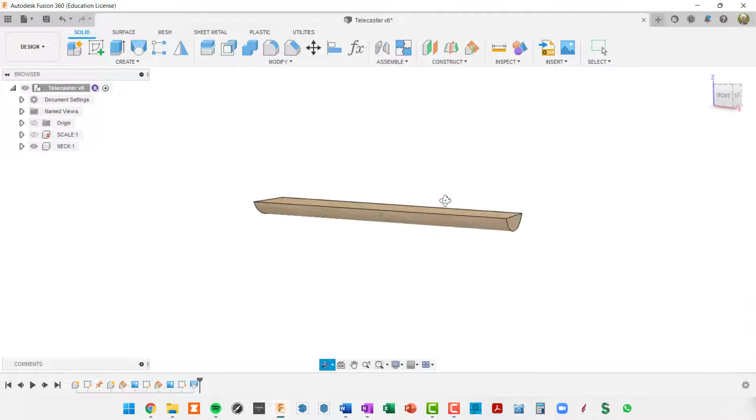So here's where we stand at the end of the first video. We have our neck profiled basically from fret 1 position to fret 12, and we've also created a scale in a separate component showing all of the fret positions and also showing the bridge and nut position.

So in this video we're going to extend the neck towards the body and create the heel.

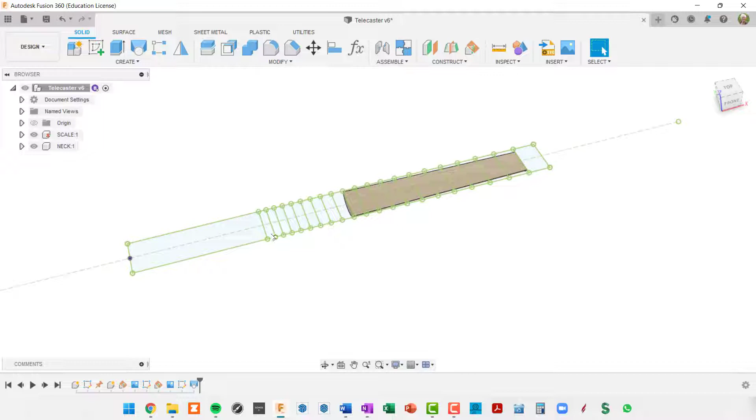I think the first thing I'm going to do is lock down the neck. We locked down the scale already, but we don't want to be able to accidentally move this neck around in 3D space. So I'm going to right click on the component and select ground, and now if I try to move it, it's not going to move.

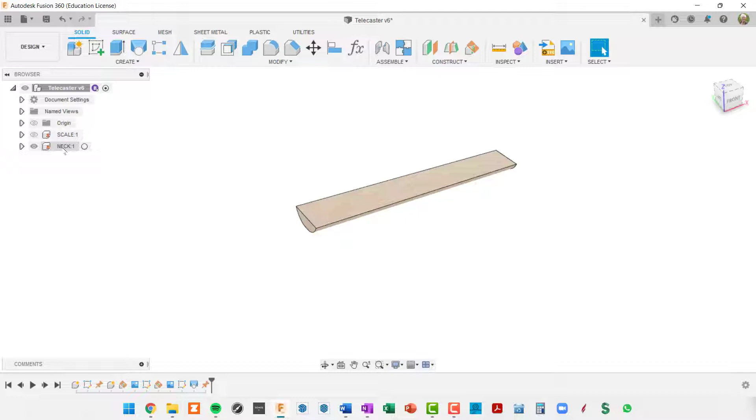All right, so the next thing we're going to do is bring in another drawing, actually a drawing of the body, so that we can extend the neck the proper distance. Before I do that, I want to create another component because I want to put that body canvas inside the guitar body component.

So I will create a new component and name it body. That component is automatically activated by Fusion, so now when we insert another canvas, it's going to go inside that component.

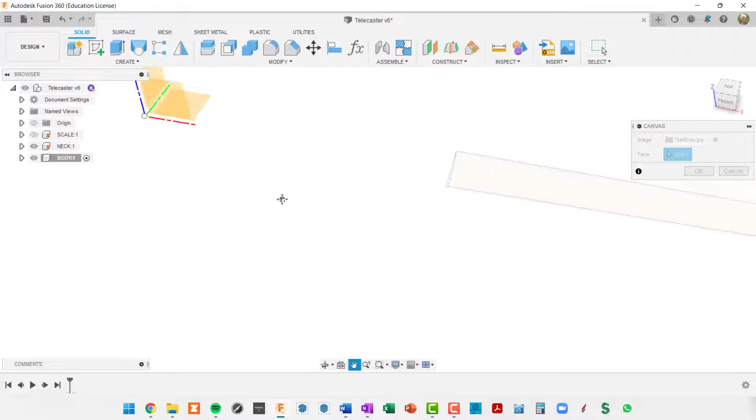So I'll go to my planes here and pick Telecaster body, and I'll select a plane to insert that on, and just take this plane right here. At the same time, I'm going to cut my opacity down a little bit.

Okay, so this canvas came in pretty small, so obviously we need to scale this up. So the first thing I'm going to do is expand my body folder, expand my canvases, and there's the canvas that I want to calibrate.

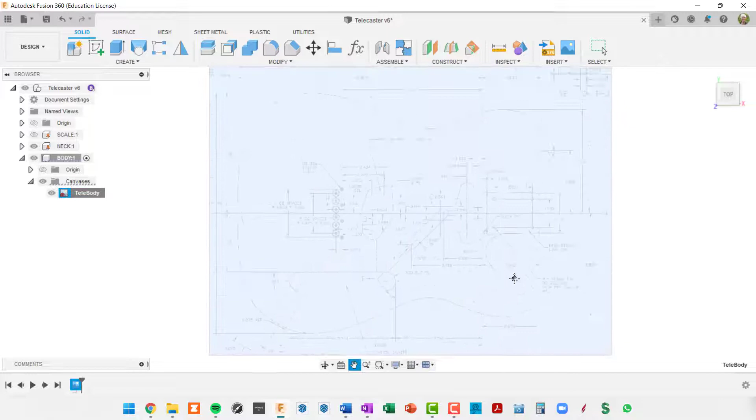So I will right click, calibrate, look at it from the very top, and now it's just a function of trying to find a decently long measurement here to calibrate from. I think I'm going to use this one right here.

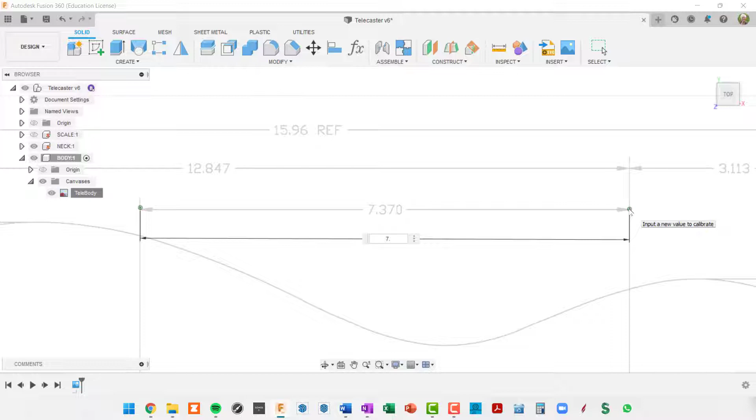So I'm in my calibrate tool. I've got this crosshair here, and I've got the 2 points that I want to calibrate to in sight. So I'm going to click on one of them and then click on a second one and then type in that measurement. 7.370 inches. And I'll press enter.

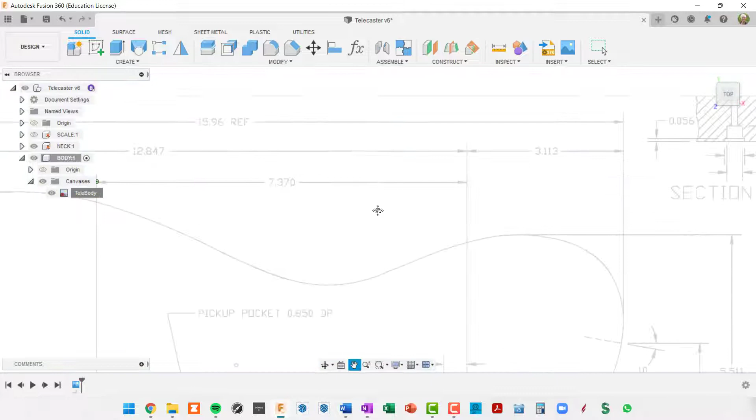So now we've got a scaled up body. Let me just verify one of these measurements is close. I'll go back and calibrate again, and click on this side, and then click on this side. And we've got 7.36 and a fraction. So we're fine there. I'm going to hit escape.

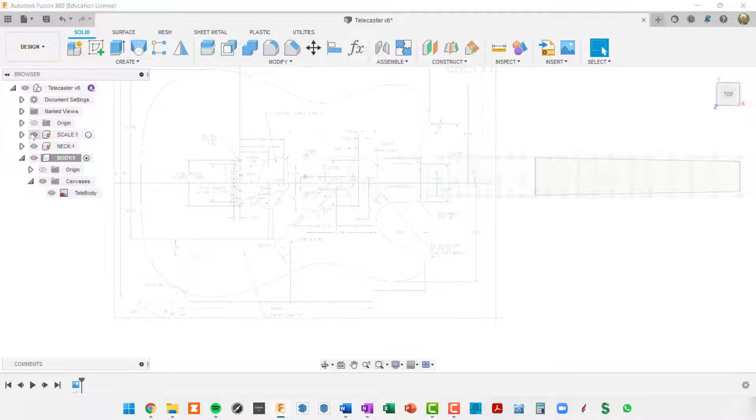All right, so now we want to actually move this body into the proper position relative to the scale. So I'm going to turn the scale on. One of the things you can see is the scale actually has an ending here, which is our bridge position, and the drawing also has a bridge position, which is this line right here. So I'm going to activate the top level component just so that we can see a little bit better both the drawing and the scale.

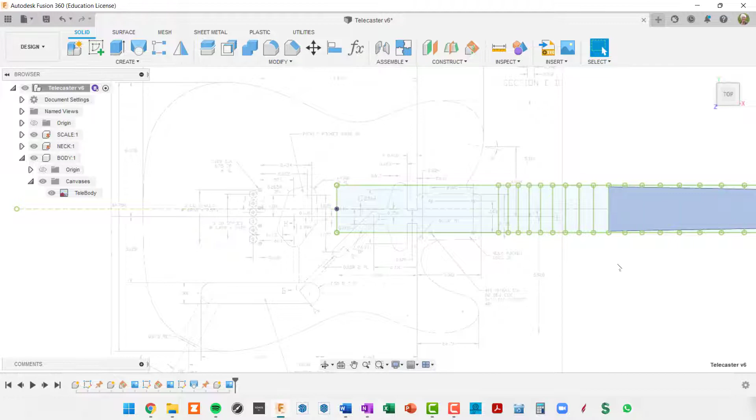And I think I'm going to go back in there and change back into the canvas and change the opacity, make it a little bit stronger here. Okay, so now we can see both the scale and the drawing, and we want to do two things.

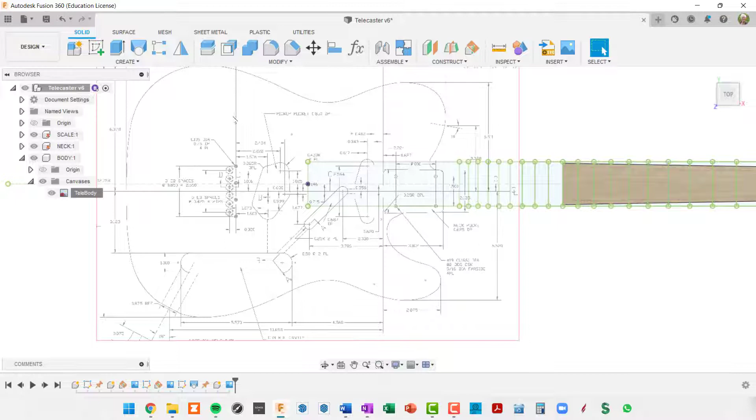We want to align this center line in the drawing to our center line of the scale, and then we want to align this vertical line here, which is the bridge line, to our bridge in our scale component.

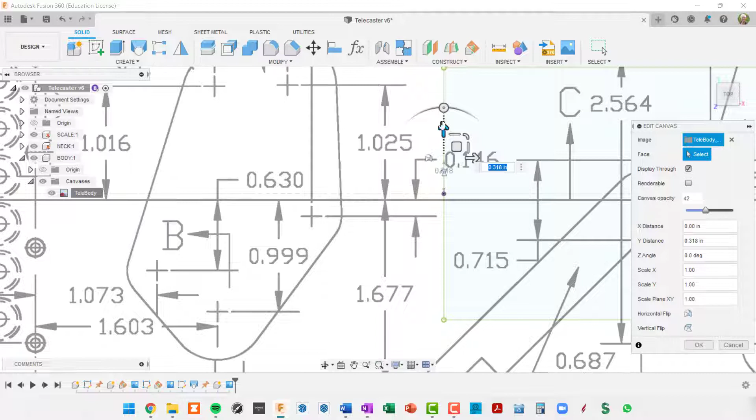So I'm going to right click on our canvas, go to Edit Canvas, and I think the first thing I'll do is to center it. So I'm going to move this up and actually zoom in quite a bit so we can see our center line and get that right there.

Okay, so now we want to move it horizontally. There's our bridge line in green, and I'll zoom in here to get this pretty accurate.

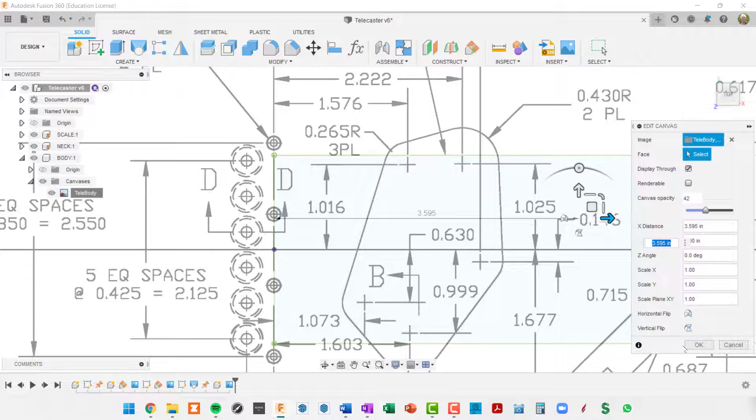Right about there, so click on OK. Now our canvas is aligned to our scale.

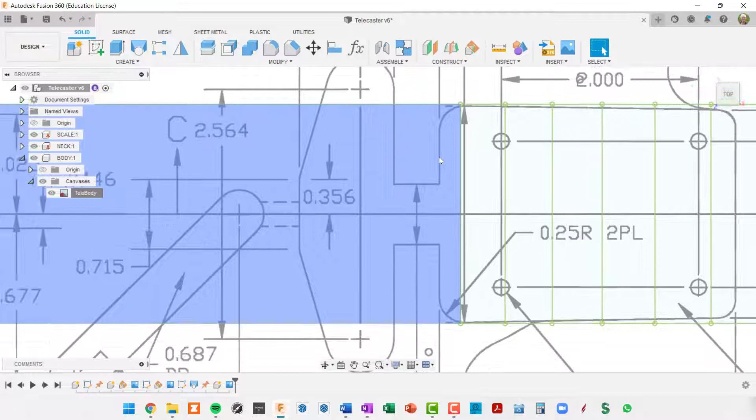So the next step is to extend this neck to this point in our drawing. I think what I'm going to do is create a sketch inside the body component. So I'll activate that and create a new sketch.

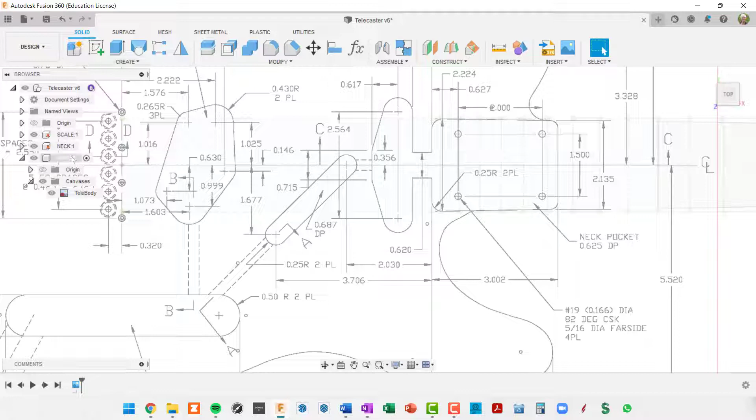So basically I'm sketching right on top of this drawing. Oops, I got into new component there instead of new sketch. Let me try that again. We're in the body component, I'll create a new sketch.

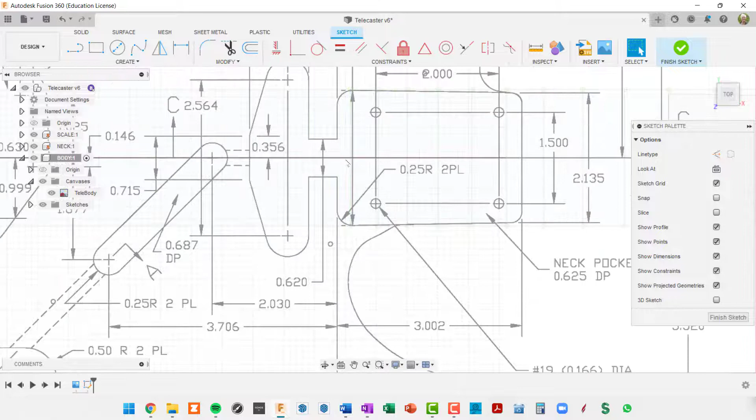Now it's asking me what plane to put it on. I'm going to do the same plane as the top of the neck. Now, this is the line that we want to get in the sketch initially, and we want this line to start from our center scale line, which is a little hard to see here because I changed the opacity again of that drawing.

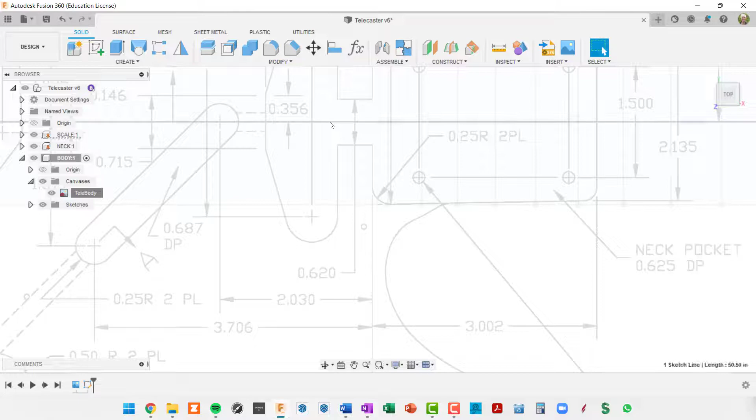So let me get out of the sketch and one more time get into this canvas, edit it, and turn the opacity way down. Now I think we're going to be able to see our center line right there, and we're also going to be able to see this end of the neck, the heel end of the neck.

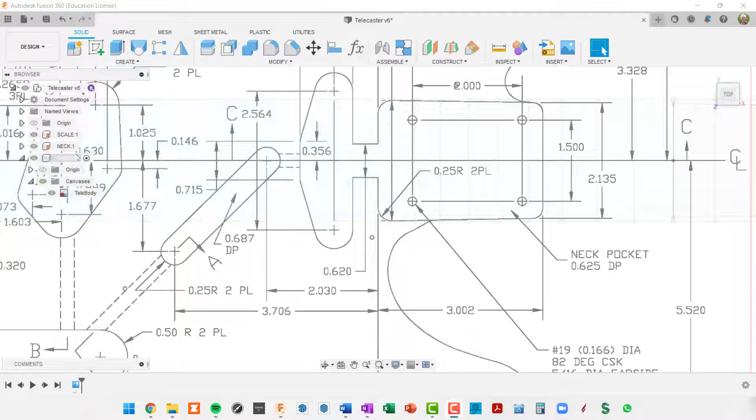So the next thing we want to do is draw a vertical line over this drawing to represent the heel end of the neck. But I want to do that sketch inside my neck component, so I'm going to activate that neck component. I'll collapse the body down and expand my neck out so I can see what's going on.

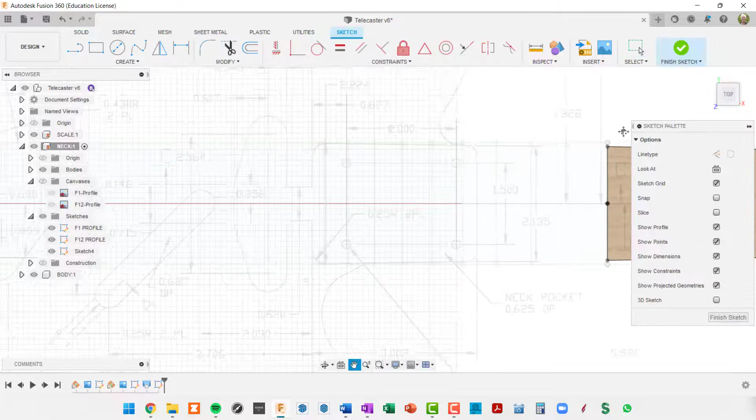So then we'll create a sketch, and the sketch plane is going to be the top of the neck, so I'll click there. And now we get the drawing back in view.

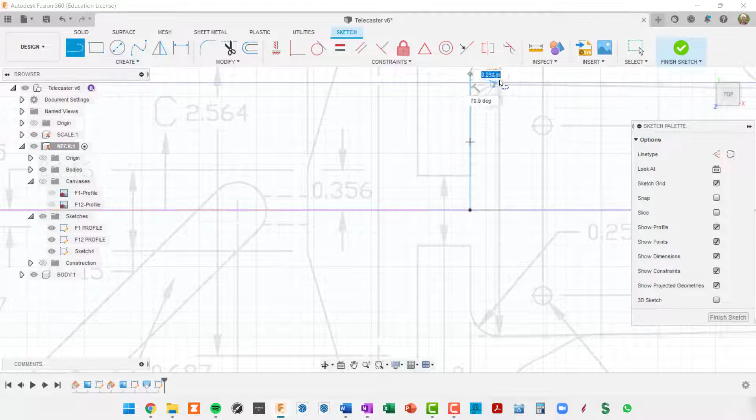So if I go get my line tool now, and if I hover over our center line, which is in the scale sketch, you can see that I get an X, an intersection with that center line. So I'm going to click there, and come up vertical and go beyond the half width of the heel, click again, and then click in this little check mark, which is eluding me.

There it is. Then I'm going to start again in the center, click there, and go down vertically beyond the width, click there, and check mark. So now you can see we've got a vertical line that aligns with the drawing.

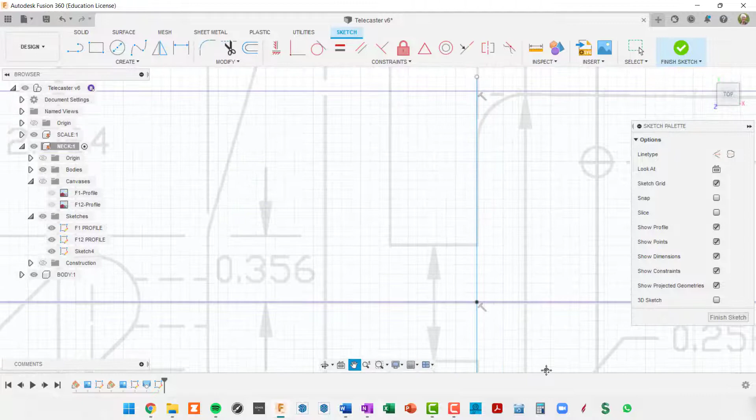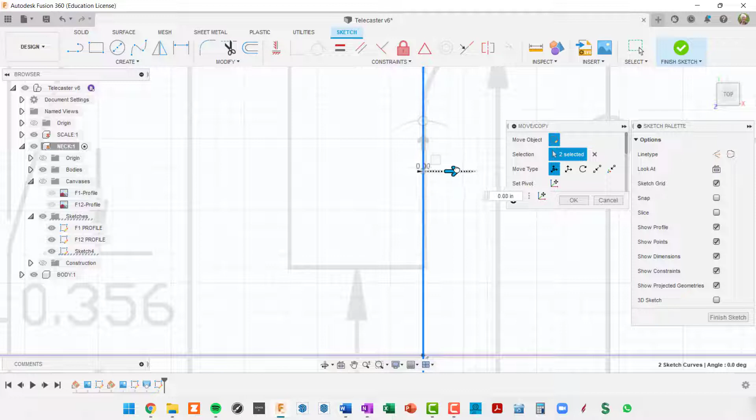If you don't quite get it there, I guess I could tweak that a little bit. I'm going to click and shift click on that line and then press M for move, and in the move tool I can actually move both of those line segments around a little bit. So if I zoom in, I can see, I can get that exactly on the right spot in the drawing. Okay, so I'll click OK.

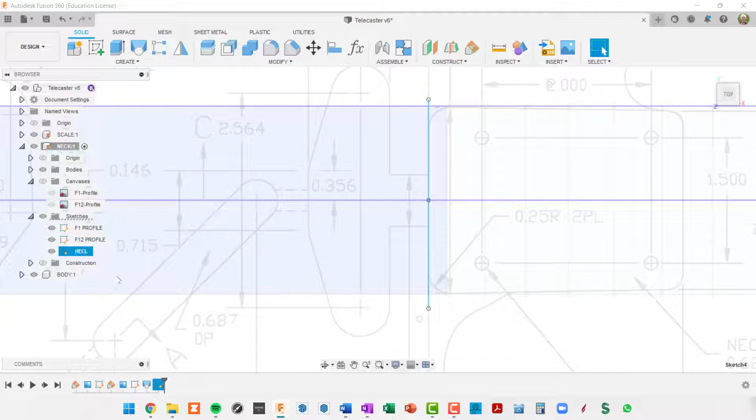So now that's going to be where we essentially extrude our neck, our existing neck, out to this line. So let's finish the sketch, and I'm going to go over to the browser and click in that sketch, wait a second, click a second time, and name that heel. We're actually going to put more stuff in that sketch, that's just the start of our heel.

All right, so now let's orbit up a little bit, and we can see our 3D body of our neck. And now you might think, oh, let's just extrude this to this line. But if you do an extrusion, you're going to get a straight profile. The neck is going to be just as wide here as it is here, but in reality, the neck continues its taper to this point.

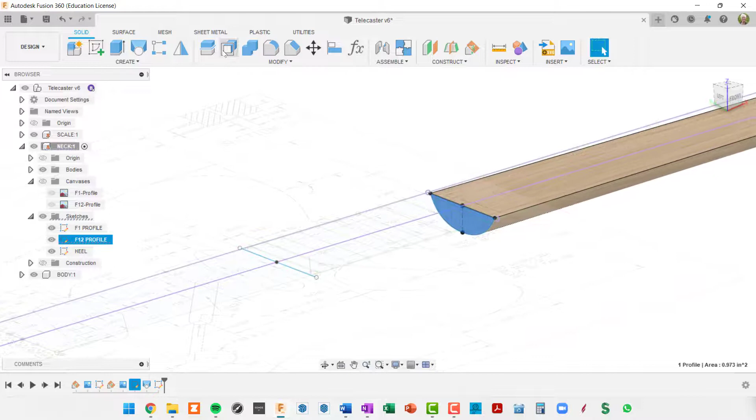So Fusion has a feature that will do that quite nicely. It's called offset faces. So if I click on there, I can select the face I want to offset, and then I can drag it out. And this is getting wider as we go. But I don't seem to be able to snap to this line.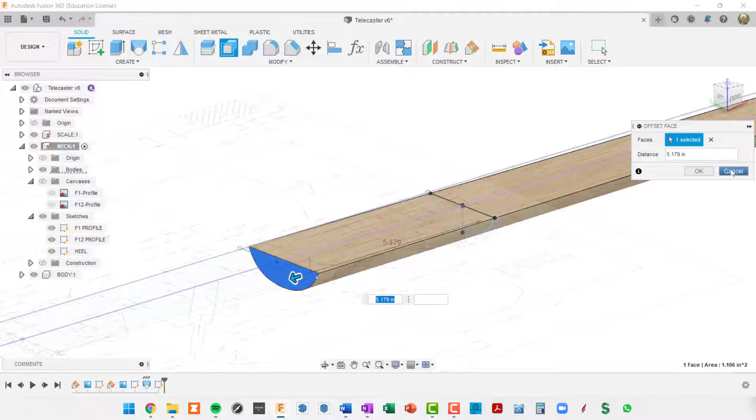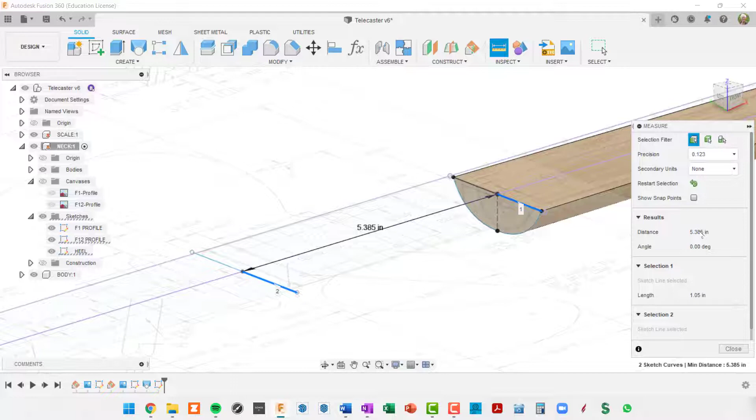And I do see that I've got a distance here in the dialog box. So I really need the distance from this line to the end, which we can derive. So I'm going to cancel out of offset face, and I'm going to go into my inspect measure, and I will click on this line and then this line, and I'm going to get a length of 5.385. Instead of writing that down or trying to memorize it, I'm just going to click in the dialog box, and that will copy that value so that we can paste it later on.

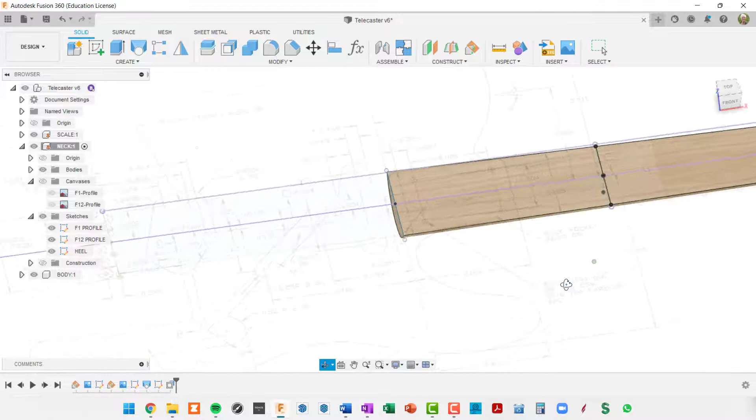So I'll close, and I'll go back to offset faces, select the face we want to offset, start it in the proper direction, and then I'm just going to do a Control V, which is going to paste that value in, and click on OK. So now we've got our tapered neck. It is actually wider here than it is here. And let's look at it straight on from the top.

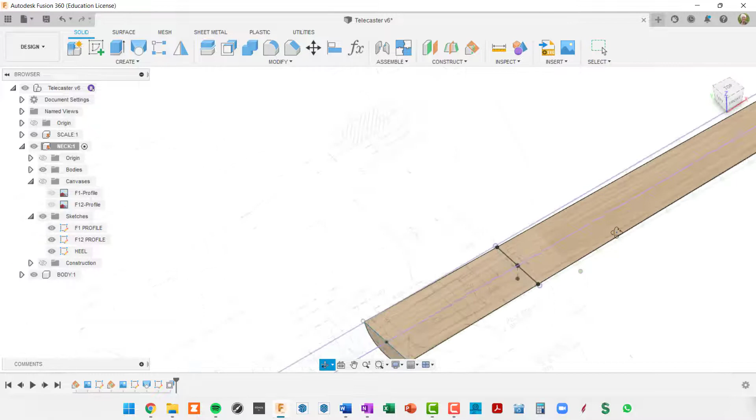And one thing that I notice is the neck is actually a little bit wider than the pocket in the body that's going to receive it. So how do we fix that? Well, that's actually a lot easier than you would think. We're going to go back to the fret 12 profile and actually change the width of that profile very slightly. And then Fusion will automatically redo the loft from fret 1 to fret 12 and automatically do the offset faces that we just did. So all we need to do is find the proper sketch, which is our F12 profile.

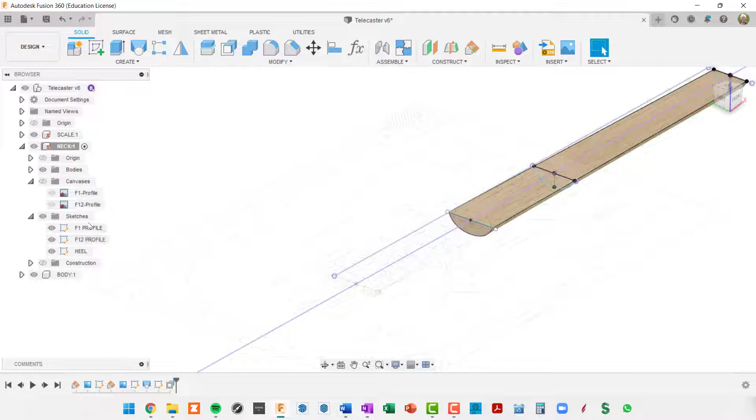And this is a good example of why you want to name your sketches. You don't want to be looking at sketch 1, 2, 3 here and figure out, well, which one is which. Now I know. F12 profile is what I want. So I click, right click, edit sketch, and I'm in my F12 profile. But I can also see my F1 profile. So I don't want to accidentally select that. So I'm going to hide that sketch.

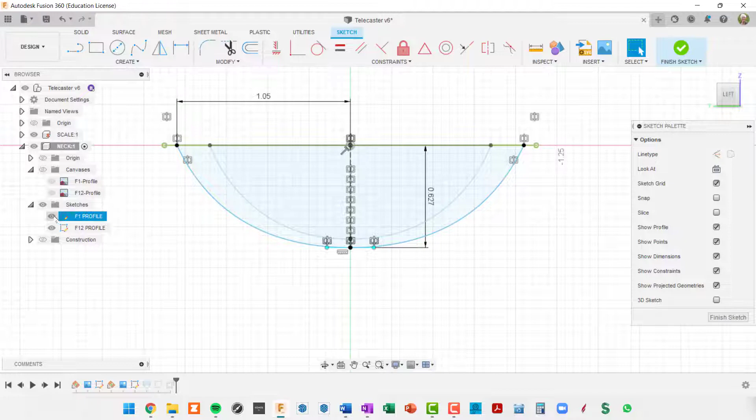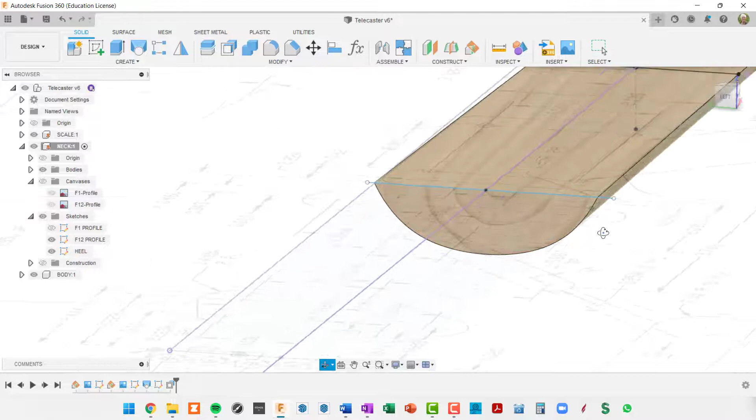Okay. Now, there's a measurement here, which is half the width of this profile. So I'm going to double click on that and then just ever so slightly change that to 1.04. You can see that the profile width changed a little bit. And I'll finish the sketch. And now let's take a look and see if we look straight on from the top. Let's see how we stand now. You can see that the neck got a little narrower, but it's still a little too wide.

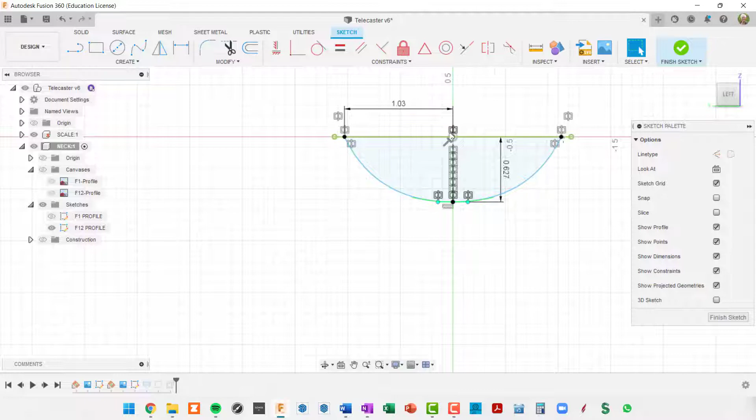So let's go back to our F12 profile sketch, edit that, and let's change that to 1.03. So a bit of a trial and error thing here, but not too hard to do this. Again, looking at the top, and to me that looks perfect. That taper comes right in and matches the drawing absolutely perfectly.

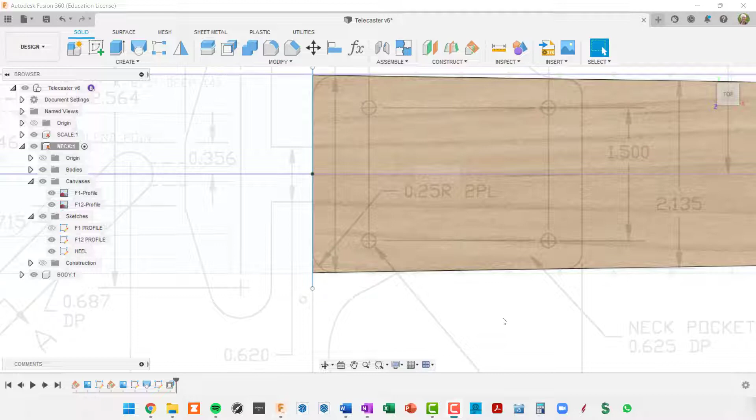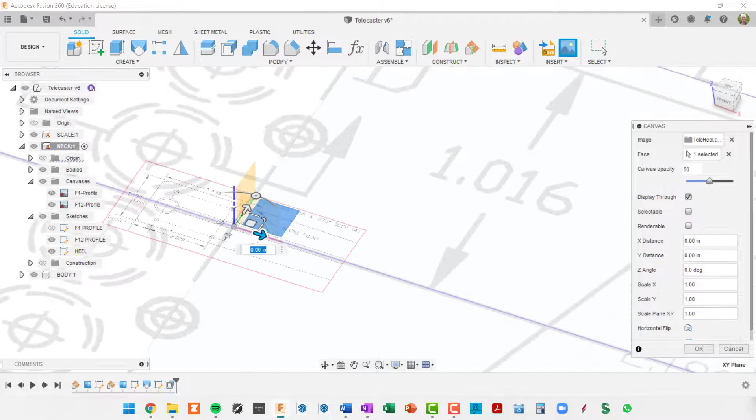So the next thing we want to do is bring in another drawing, and this is going to be the profile of the heel that we're going to extrude. So I'm going to go to Insert Canvas, and I will pick my Tele Heel and do an insert. And now Fusion wants to know what face to put it on, so I'm going to select this plane here in our origin. And then I can see this drawing here. So I'm going to click OK, because the first thing we want to do is go back in and calibrate it. So here's my new canvas, Tele Heel.

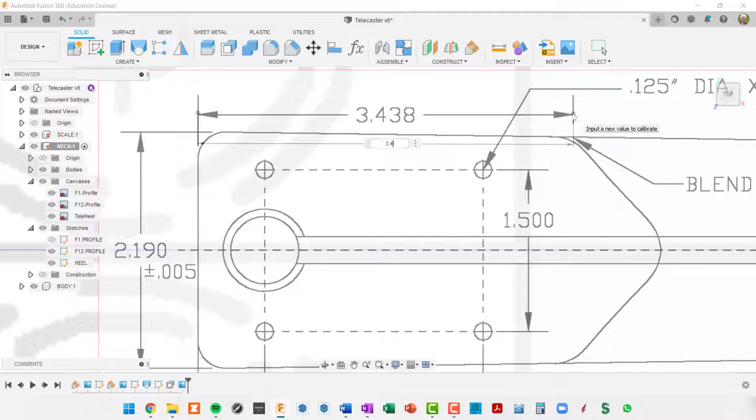So I'll right click, calibrate, take a look at it from the very top, and zoom in and calibrate using this measurement. So I'm clicking here, I'm clicking here, and then typing in 3.438. Okay. So we've got a new drawing that's properly scaled, and now we want to move it. So I'll right click and do an edit canvas. First thing is I want to line it up to the center. It looks like it's pretty darn close. We'll tweak it just a little bit, get it on our center line.

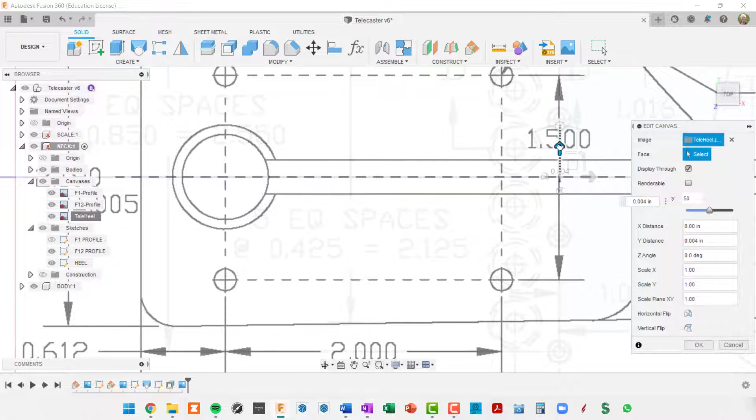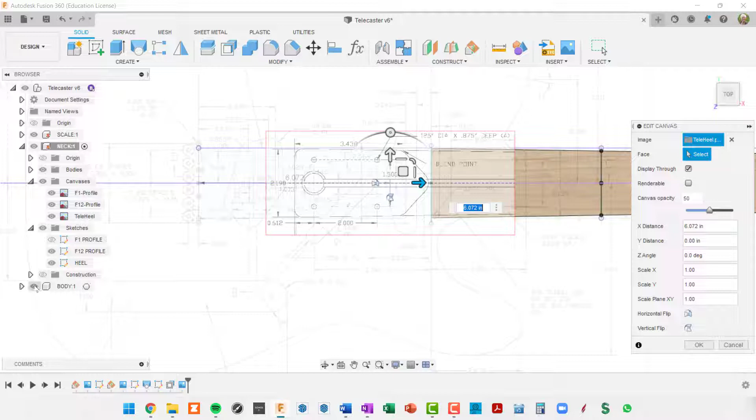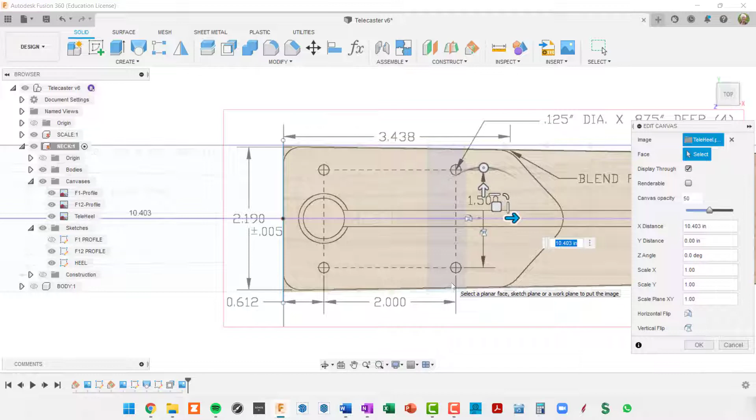Okay, and then we want to bring this over and basically align this side of the canvas to our drawing here. So I'm going to turn off some of these other canvases that are getting in our way. In fact, I'm just going to hide the entire body component that has that body canvas in it. So I'll bring this over and zoom in a whole bunch and align to the end of the heel. So the drawing and the 3D model align pretty nicely now, and we've got it nicely centered. So I'm going to click on OK.

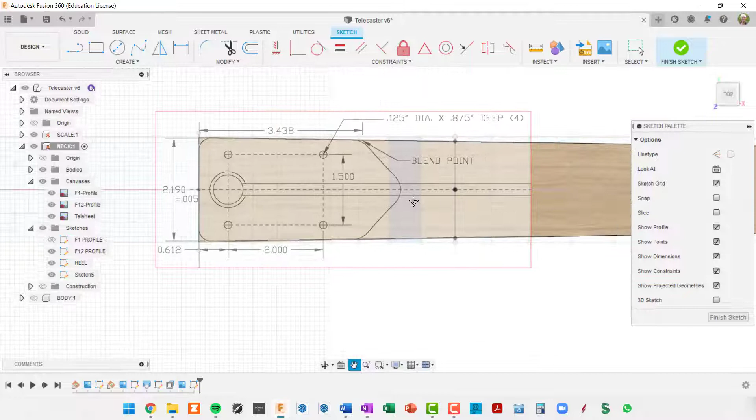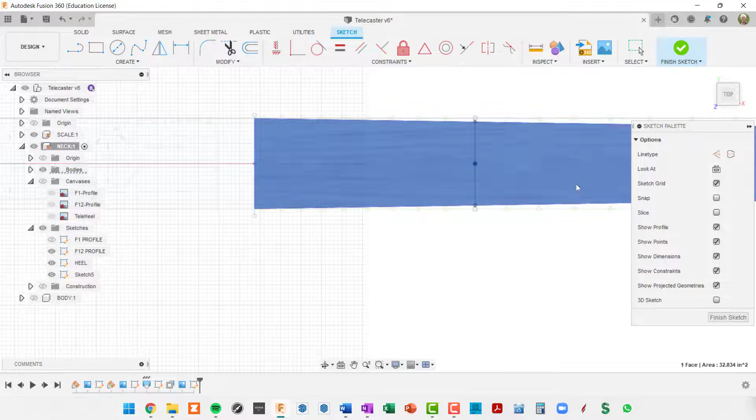So now we're going to define the heel profile in a new sketch. So I'll go up to Create Sketch, and we'll select the top of the neck as the position of this sketch. So now we actually want to project in the outline of this body into our sketch. So let's go ahead and hide our canvases and hit P for project. And then we can select an entire body here by hovering over this and click OK. So now if we hide the body, we can see that we have the outline of the body in our sketch. And we can turn our canvases back on.

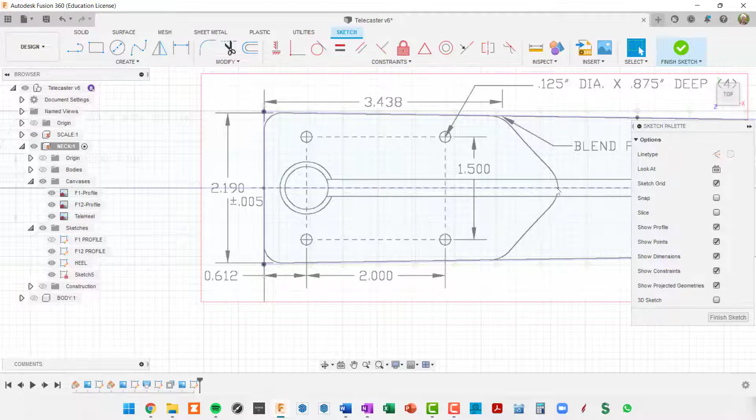Okay, so now we have what we need to finish this sketch out. We're going to start from the center line, and we're going to do a spline that goes back to this outer part of the neck. So I'll get my spline tool, and I want to make sure that I intersect with my midline here. So I'll click there, and then just kind of estimate where that starts right here. Click a second time and click on my check mark.

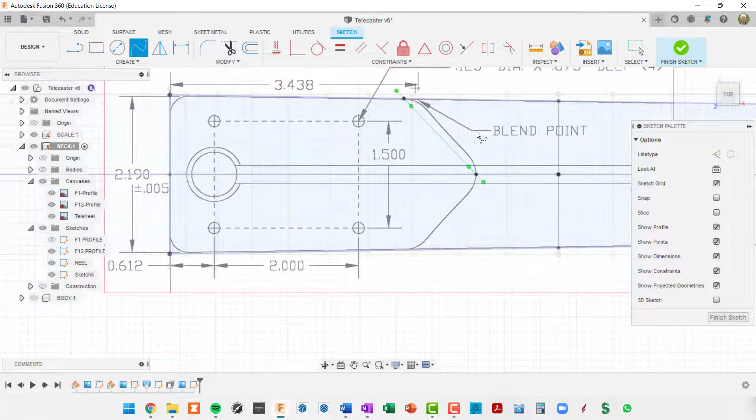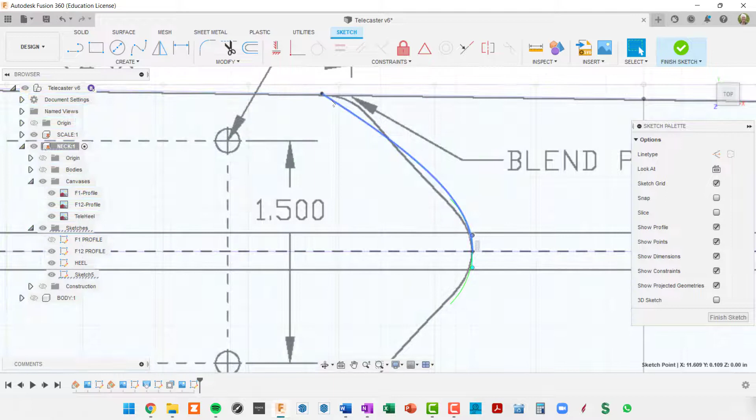Now we're going to mirror this spline to the other side to get symmetry. So again, I want to make this tangent handle vertical. So I'll click on the tangent handle and go to my horizontal/vertical constraint. And then I hit escape to get out of that constraint. And now you can see I can't change that angle. Okay, but I am having trouble with just these two tangent handles to define this curve, which is a little bit more complex than we can deal with in this spline.

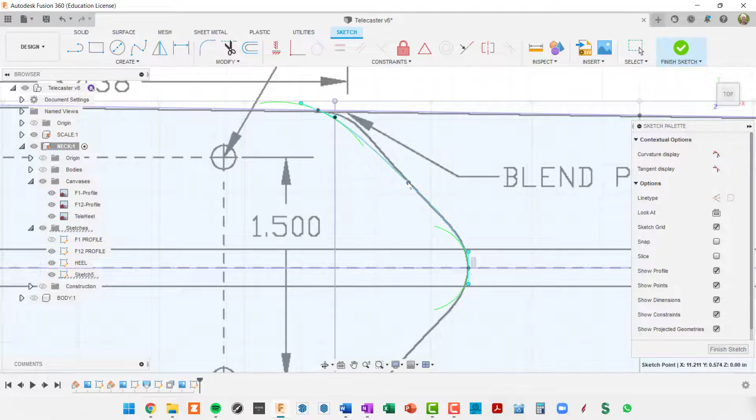So one thing you can do is click on the spline and then right click and insert a new spline point. And then this crosshair comes up and allows you to insert that point anywhere you want. Okay, so I'll hit escape to get out of that insert mode. And now I can actually move that point around anywhere that I like. I could put it up here. I'm going to put it right in the midpoint and see if we can deal with this now.

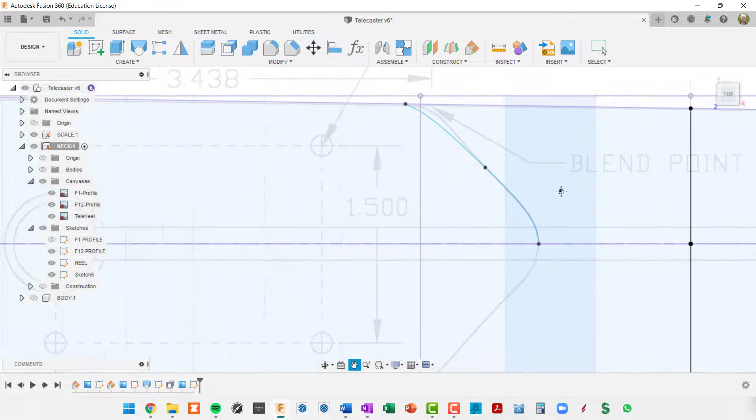But again, we've got a canvas that's a little too strong to be able to see our lines. So I'm going to finish the sketch. I'll go into our canvas and edit it and change our opacity down to somewhere around 10%. Okay, so now we can see what's going on. All right, so let's go back to our sketch. It's just called Sketch 5 right now. So I'll right click and edit it.

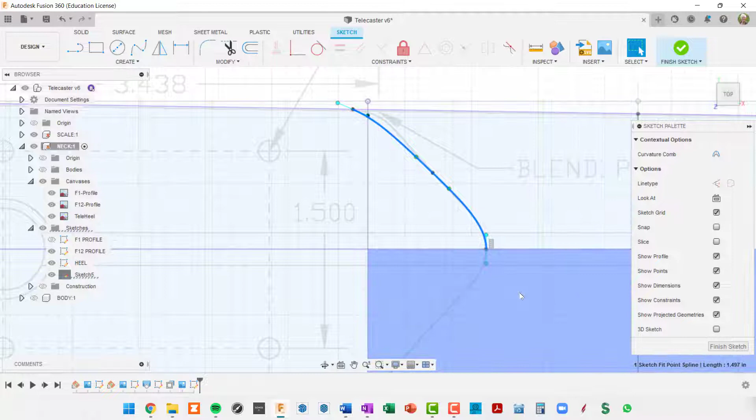Click on our line here. And you see we've got a lot of flashing going on. Fusion is trying to select parts of our scale. So I'm actually going to hide the scale, and that solved that little issue. Okay, so now can we get this spline to kind of match our drawing? So let's work with this tangent handle here, and that's pretty good right there.

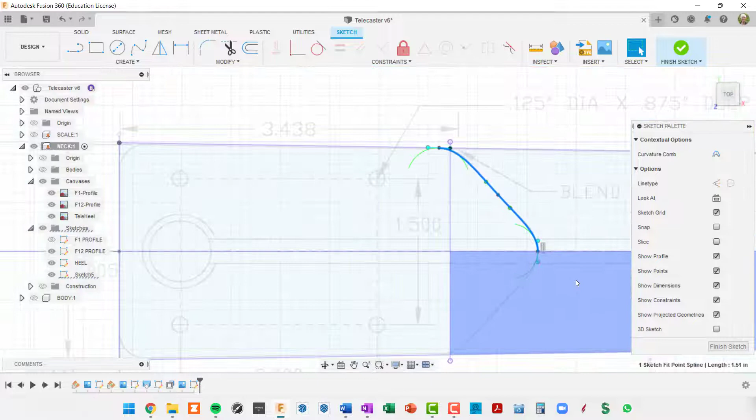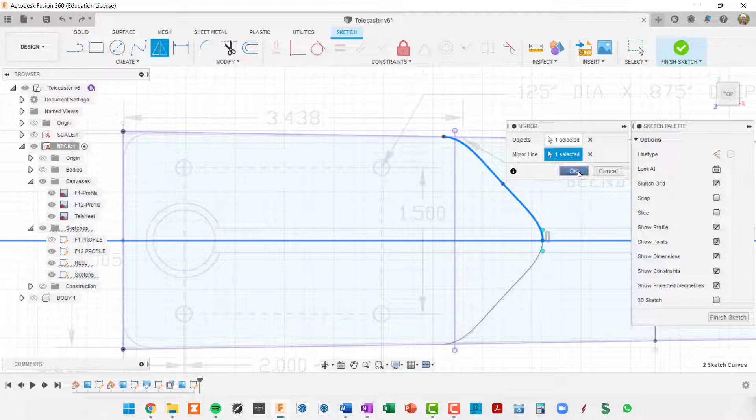I like that. Okay, so we can now mirror that about this center line and get perfect symmetry here. So I'm going to go to the mirror command, select our spline, and then click on mirror line in the dialog box and select our center line, and it gets mirrored to the other side. So I'll click on OK. And now when I hover over this profile, you can see it's kind of divided up into 4 parts. So when we did our projection, we actually got some extra lines projected in there that we don't necessarily want.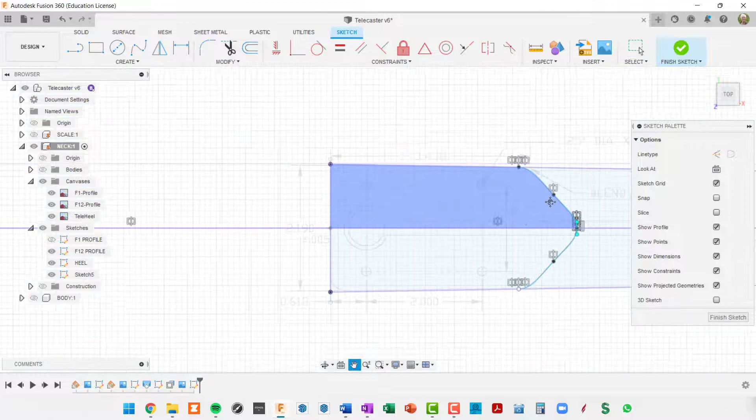So I'm going to click on this vertical line and hit the delete key. And then this line, I'm also going to delete. Okay, so now, oh, looks like we still have one. So if I right click on that and do a delete, that actually worked. Okay. So we have a single profile here, and I think our sketch is done. So I'm going to finish out of the sketch.

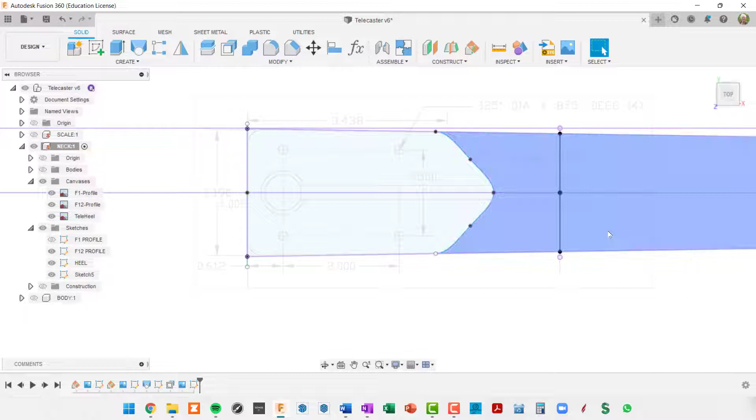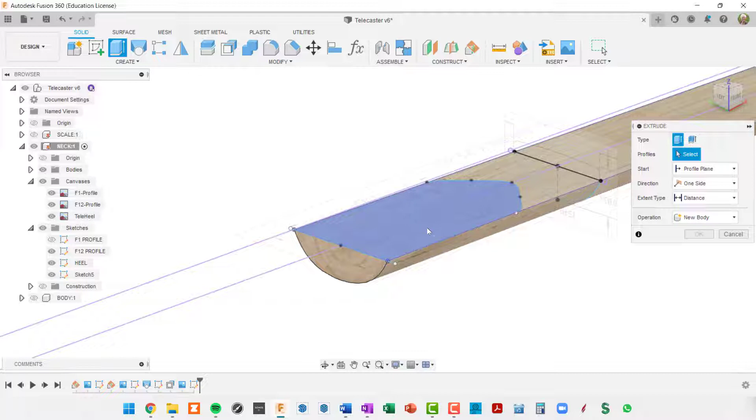Now remember, we hid our bodies a little while ago, so I'm going to unhide the neck body so we can see what's going on. And I'm actually going to extrude this downward, and the thickness is going to be 3/4 of an inch. So I will go to Extrude, select the profile I want, push it down. Now Fusion defaulted to a cut mode here, which is the red you see. So I'm actually going to change that to join.

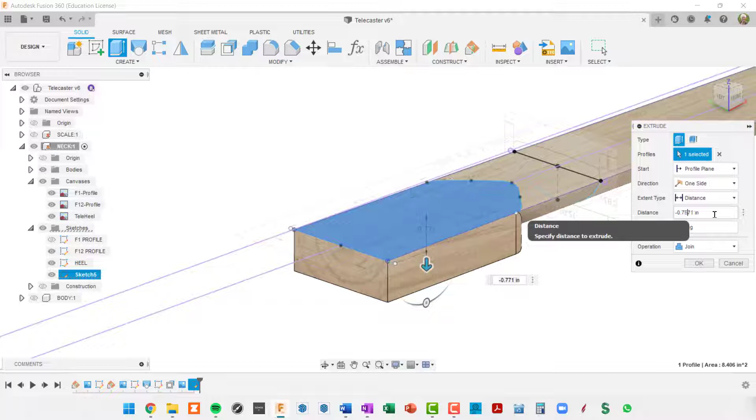So this extrusion is going to join with the neck body. And the distance we want is negative, so I'm going to put negative 0.75 and press enter. And then let's take a look. So let's do a little bit of cleanup here. We have a couple of extra lines that are showing up, which are in sketches. So let's turn our sketches off on our neck, and then I can still kind of see a ghosting here of some other things. So let's turn our canvases off, and there's our body.

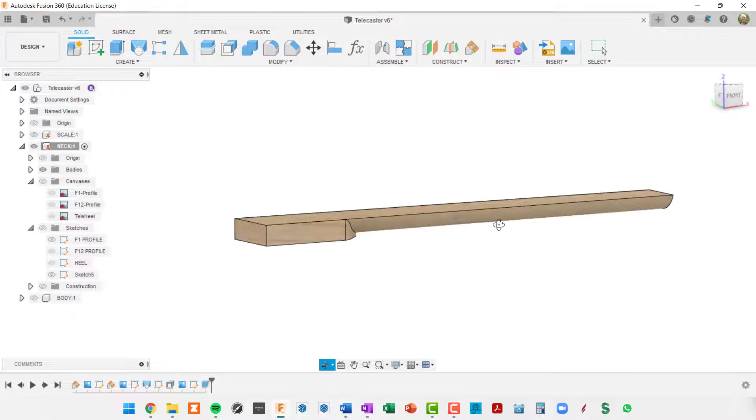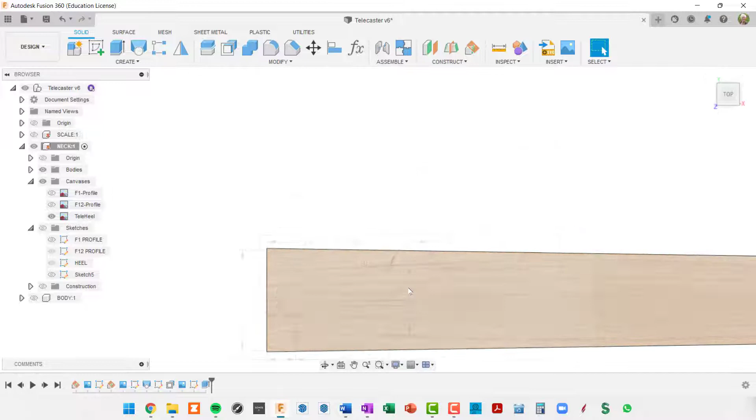So we've got our neck, which flares out as we go towards the end of the heel. The one thing we still need to do is a curvature there. So let's bring our heel canvas back up, and let's take a look at it from the very top. And if we zoom in, we can see exactly what needs to be done. So since this is a solid body, we can actually do this

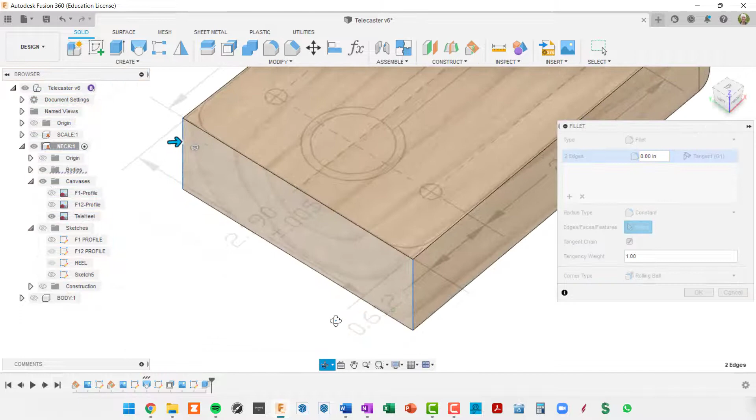as a fillet. So in order to do that, I'm going to first go to the fillet command, and then click on this vertical line and this vertical line. So now these fillets will be identical. And I can actually push this in and define the radius here, which in the plan was 1/4 of an inch. So let me type that in and see what it looks like. So there's our 1/4 inch radius. Let's view it from the top and spin around here so the neck's to the right. And that looks really good.

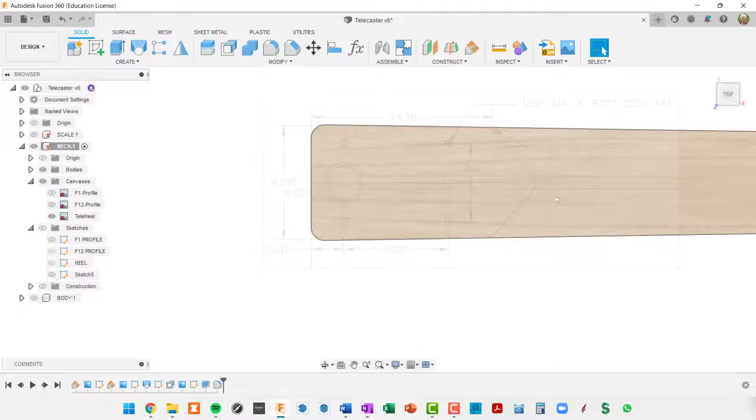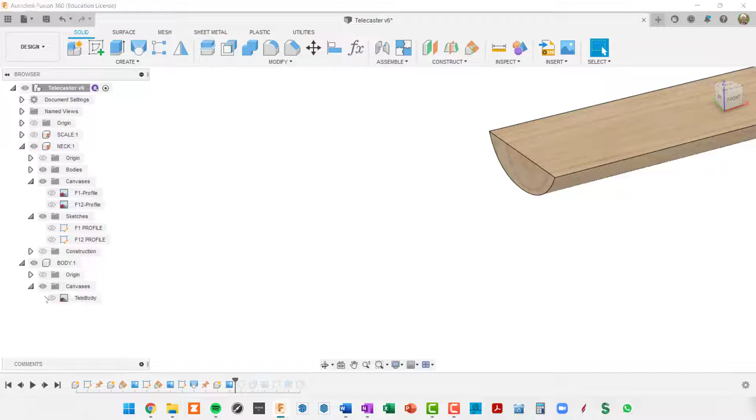So let's do a quick timeline review, and then we'll be done with this video. So down here in the timeline, I'm going to rewind just after the loft that we did, which was the end of the first video. So the first operation we did was we pinned the neck component so that that doesn't automatically get moved using the ground command. Then we created a new component, which is the body. We did that because we want to put this canvas into the body. And if I open up the canvas folder, I can show you the canvas that we brought in.

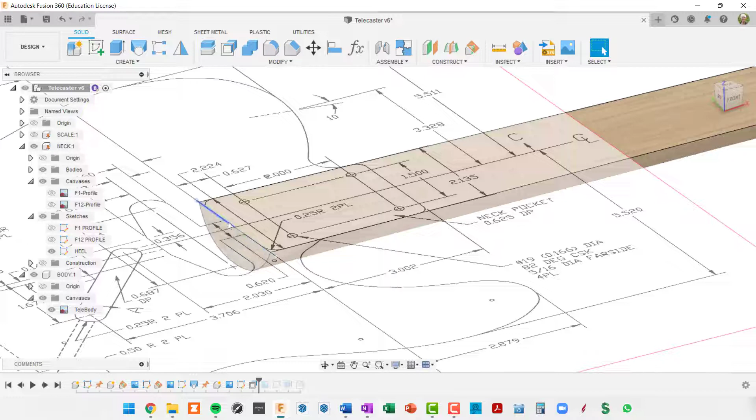Next thing we did was a sketch on that canvas. A little hard to see, but I'll hover over those two lines. And that's basically just the end of the heel. Then we did an offset faces to basically extrude the neck, but keep its profile, to keep its tapering going up to that end point. Then we brought in another canvas. I'm going to hide the body canvas so we can see it. We brought in another canvas, which is the heel profile. Did a sketch on top of that, and then extruded that down by 3/4 of an inch, and then used the fillet command to round things over.

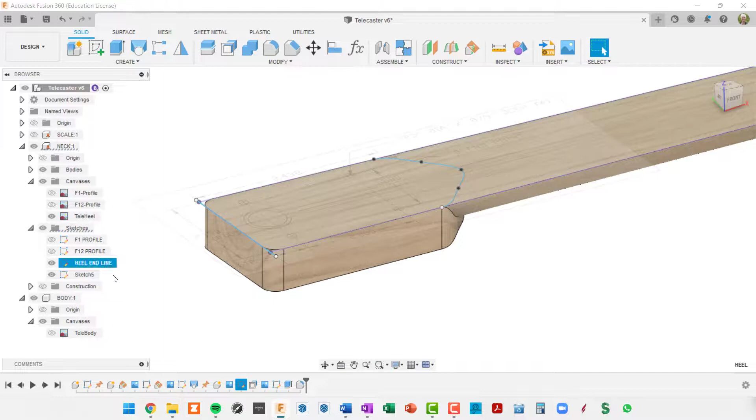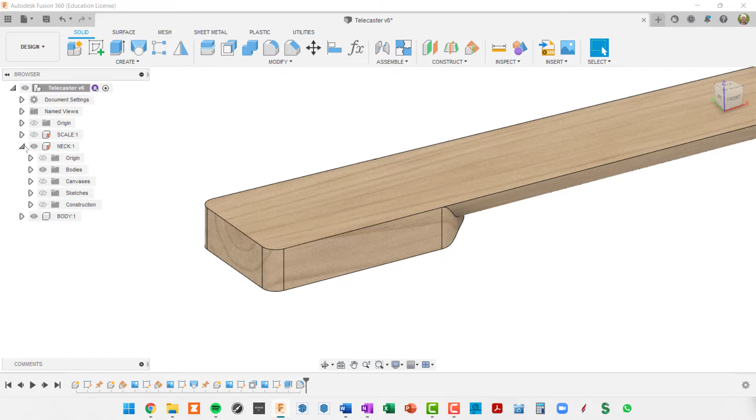So a little bit of cleanup here. We didn't name this sketch, and this is really our heel sketch. I'm going to rename this one first and call it heel end line, a little bit more descriptive. And then rename sketch 5 to heel. And let's see, we probably want to hide our sketches going forward, and collapse. And we want to hide our canvases, collapse that. And then we can clean up our browser, and we are done with video 2.